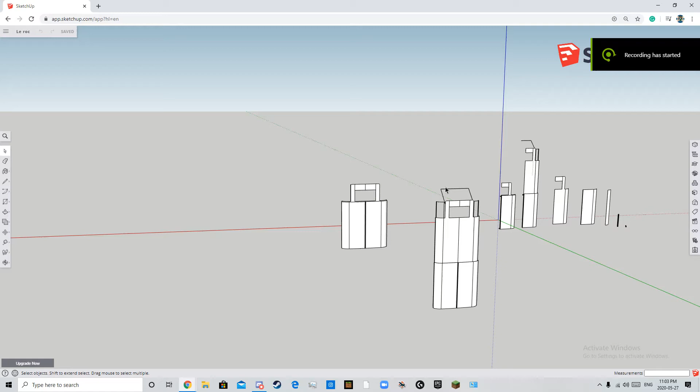Hey, I am here to give a little video on this Montagne shield that I'm building. This is Le Roc, the shield that Montagne uses in Rainbow Six Siege, and I decided to build it in real life and try to make it as accurate as I can.

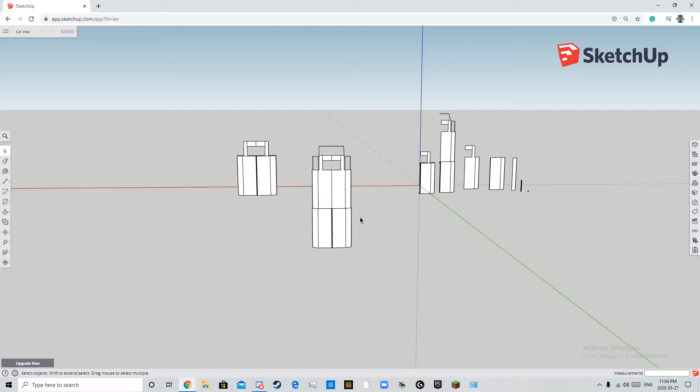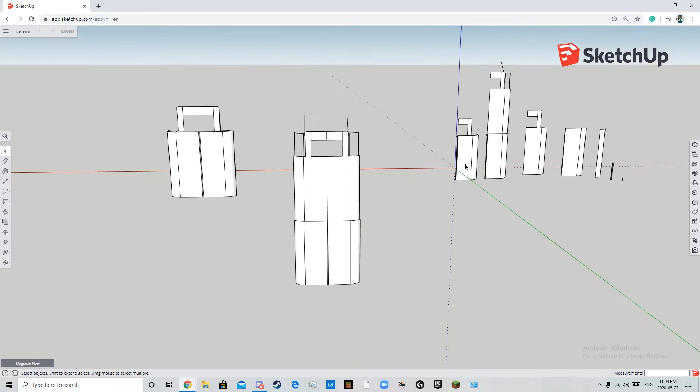So for the first part, we're going to be doing what I call the Generation 1 shield, which was from when the game first came out. This is quite simple in its mechanics, as it doesn't include the wings that pop out to the side to cover you from the side. Obviously they were added later as a balancing mechanic, but for now we're going to focus on the Generation 1 Montagne shield.

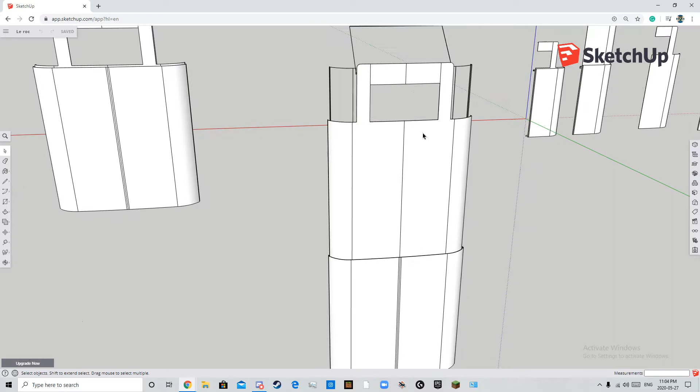So to start off, accurate to the game, we're going to use these rail systems on the side. We've got two pieces here, and for a prototype I'm going to be just using some plywood first to get this mock-up going, and maybe in the future I'll replace it with aluminium, or hopefully some steel and Kevlar. But for now, we're going to be using some plywood.

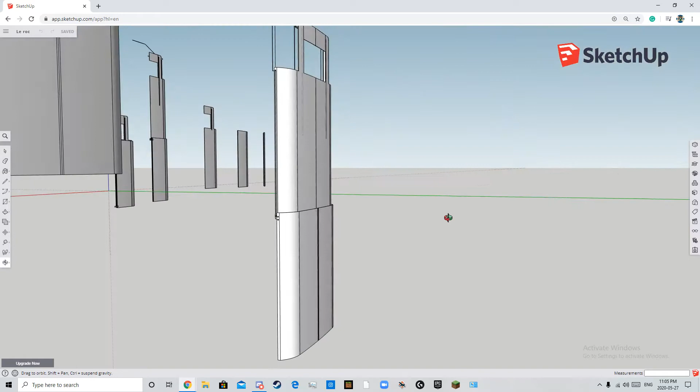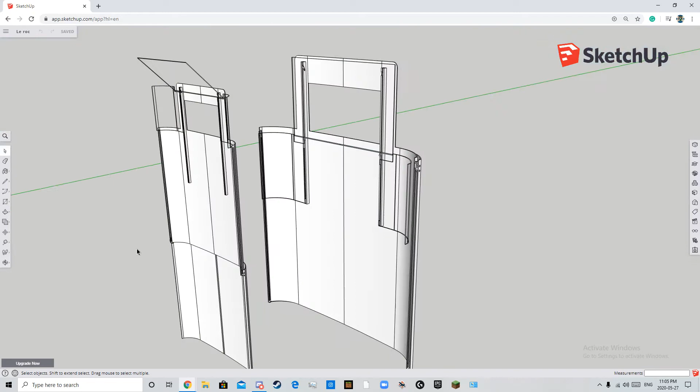So we're going to take these sheets and cut them into these sections here, as you see this shape, and we're going to be attaching some aluminium bar on the sides there, just so that we can attach these slots, and these are the tracks that will allow the shield to slide up and down and collapse and extend. Basically what we've got here is a basic little block with two bolts on each side, and that'll allow it to slide up and down smoothly along the length of the shield so it can fold away effectively.

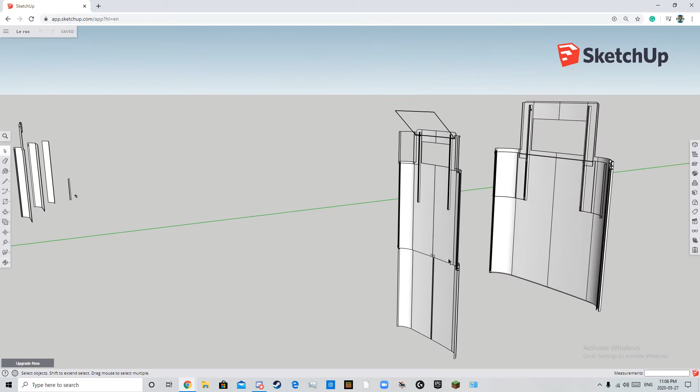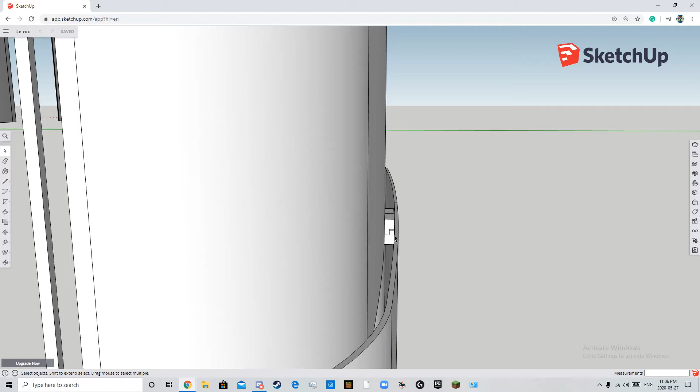In order to stop the shield from flexing towards the inside, because this is at the back and all the weight is in front of it, so it'll just want to swing back, we are going to place an interlocking block here to catch it and hold it in one spot. That'll also help keep it more solid. And that's the first part — that'll be the sliding faces.

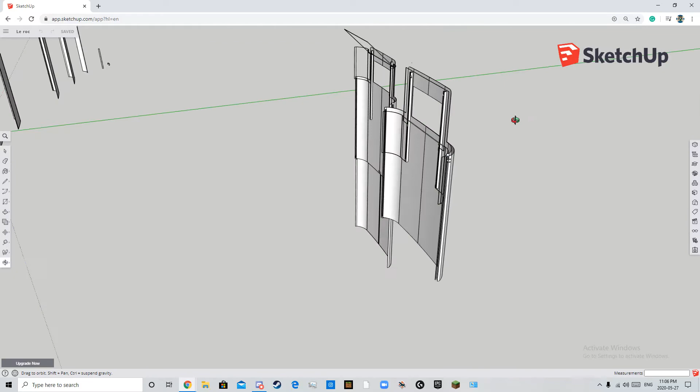For the second part, we're going to be assembling these plexiglass pieces that retract, and they will be using a separate rail system, which is a piece of C-channel aluminium. I'm probably just going to use some aluminium box section and then cut a groove down the middle.

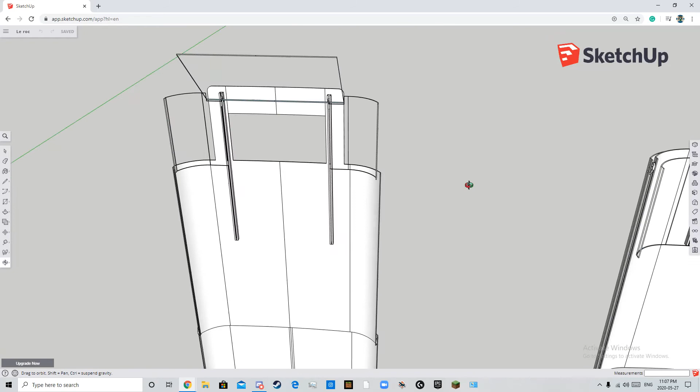And the way this works is in these tracks there are little sliders for these glass pieces. So for the wings here, it's a simple piece of curved acrylic, and then they will be attached with little blocks that will slide in and out, and those are obviously the inverse of the C-channel.

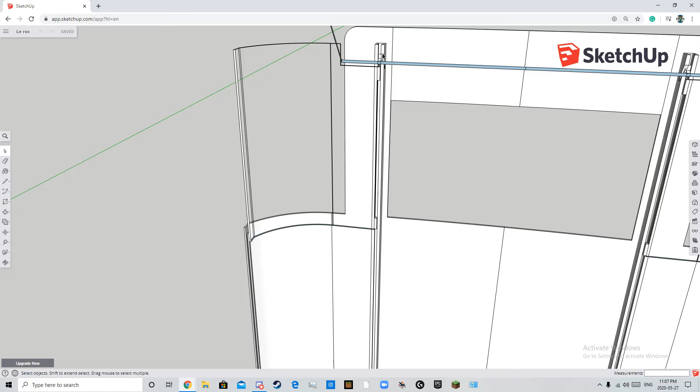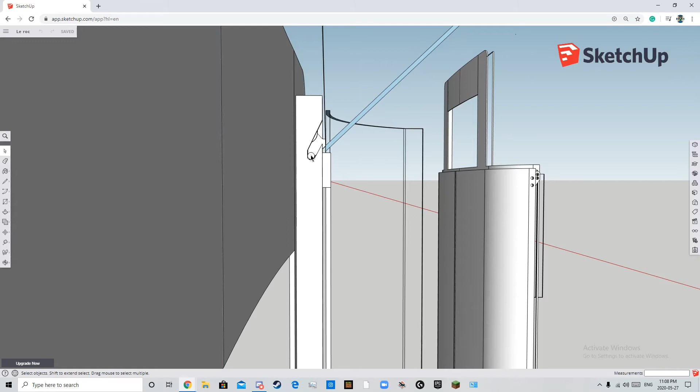And then the top glass piece obviously has to fold down and then extend over the user's head. So what we've done is we've got a nice little hook mechanism that uses a cylinder inside the channel so that it can rotate, and then a hook. So as the panel slides up, it'll reach a point where this pin can rotate in and hook.

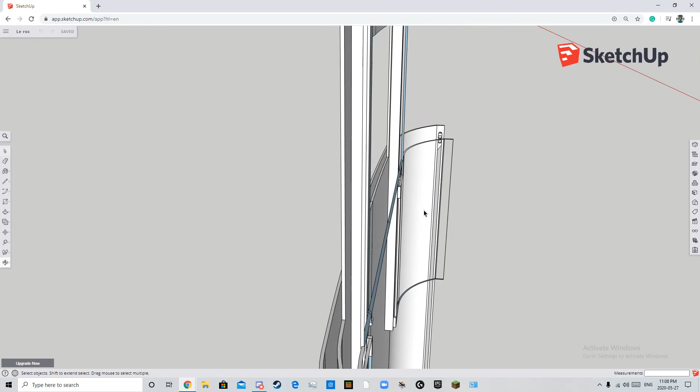So it'll start off down here like so — I'll show you this side with the slider inside the rail like that, and then the pin resting on the outside, and that will keep the panel straight up so that it doesn't get in your way, just flat against the shield. And then when it comes up here, this groove allows the pin to slip in, hold the whole assembly up, and keep the panel at an angle.

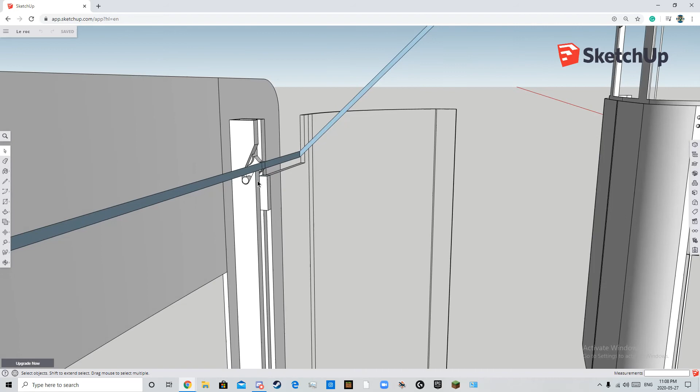Now this pin will also — we'll attach a piece of cord or steel cable or something to the panel piece, which will also hold the glass wings. So that'll all hold that in place on this rail system.

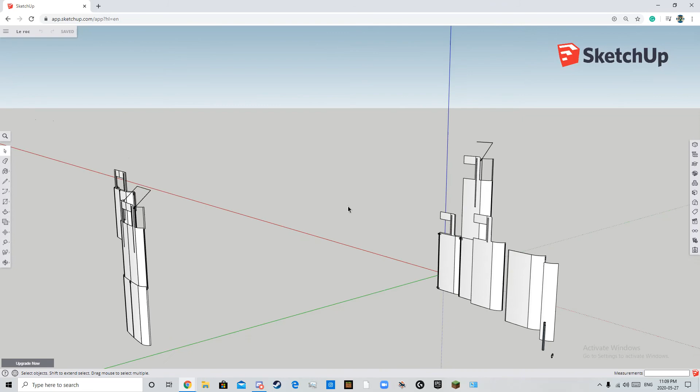So that's the CAD part of this series. If you want, I can do some more detailed parts if I missed anything, or if I was incoherently rambling. I can do another part, but that will be the first part of this series.